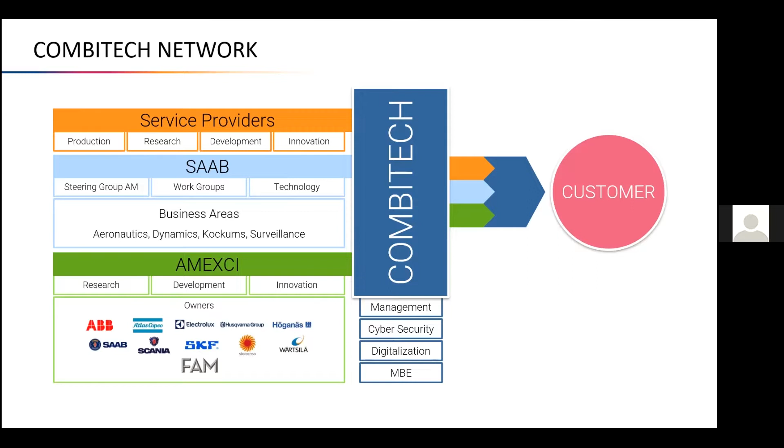This is the general process we follow when developing the AM capabilities of our customers, but of course it usually gets customized to fit with the customer needs and current knowledge and adoption of AM.

The first step is always to build a general understanding of additive manufacturing, where you want to get an understanding of what AM processes and materials are available on the market and what the strengths and weaknesses are of the different processes. We would also be looking at how AM is applied within different industries today.

After getting an understanding of the technologies that are available, the next step is to start looking at your own product portfolio and identify which applications of additive manufacturing could be the most relevant to your business.

You identify values that can be achieved through additive manufacturing in your product portfolio and the services you provide. This enables you to form a strategy of which technologies to focus on moving forward, and to set up future goals and start moving towards achieving them.

After you have identified possible applications, you proceed to evaluate them. This can be done through a part screening and a part selection, where applications are evaluated in two different dimensions: the technical fit and the economical fit.

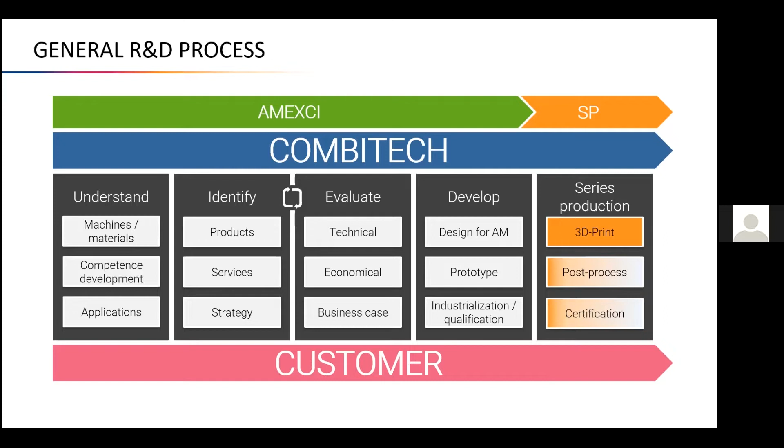I mentioned AMEXCI, which is located in Karlskoga, where they have built a state-of-the-art AM lab with production and material testing available in-house, and partners for post-processing located nearby. This is our testbed for additive manufacturing.

The owners of AMEXCI consist of 11 companies that all work actively in additive manufacturing. A huge advantage with this setup is that we don't have any competing operations within AM. This enables an open exchange between the companies.

And this is a small preview of their lab.

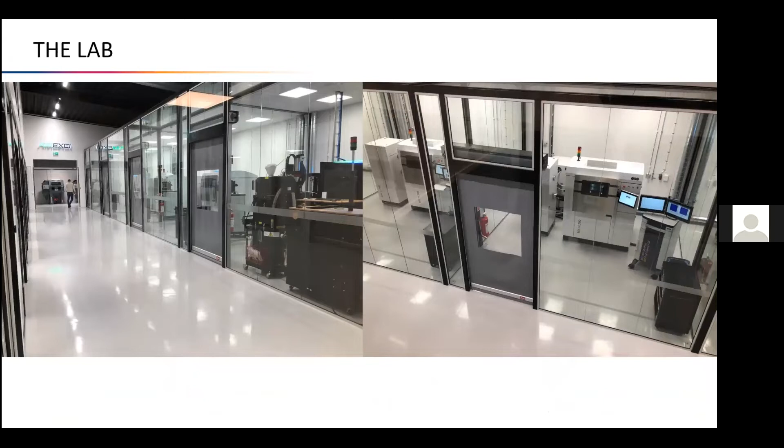Additive manufacturing, sometimes referred to as 3D printing, is a collection of processes that share a common manufacturing method: making components through joining materials, usually layer by layer, in an additive process based on a 3D model.

This makes AM different from traditional manufacturing processes, which rely on subtractive and formative processes. With additive manufacturing, we only add the material we want in our component, compared to subtractive manufacturing, where we remove unwanted material from a larger piece, and formative manufacturing processes, where we cast or form material to the desired shape using tooling.

In the end, it's the production method, joining materials layer by layer from a 3D model, that allows us to create value with this manufacturing method.

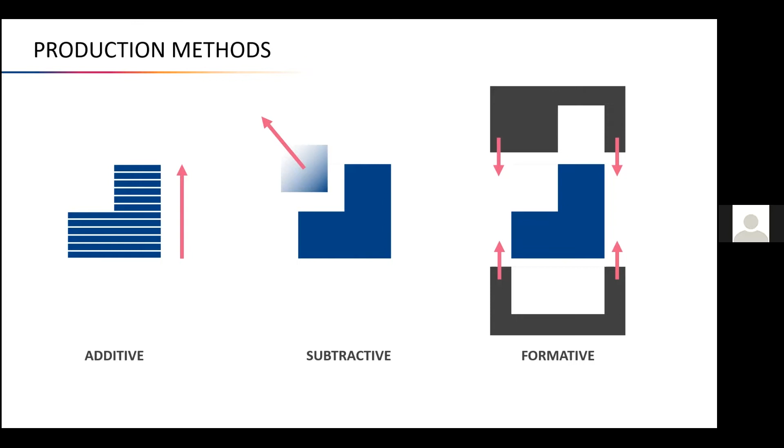AM as a manufacturing method includes a wide variety of different technologies and terms. The most common way to classify and differentiate the technologies today is by grouping them into 7 main process categories, defined by a common ISO and ASTM standard.

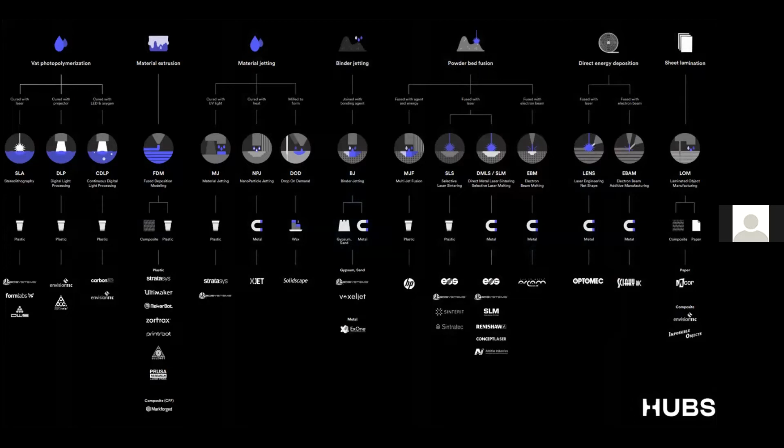For printing polymers, we make use of powder bed processes, extrusion-based processes, and processes that rely on curing of light-activated polymers.

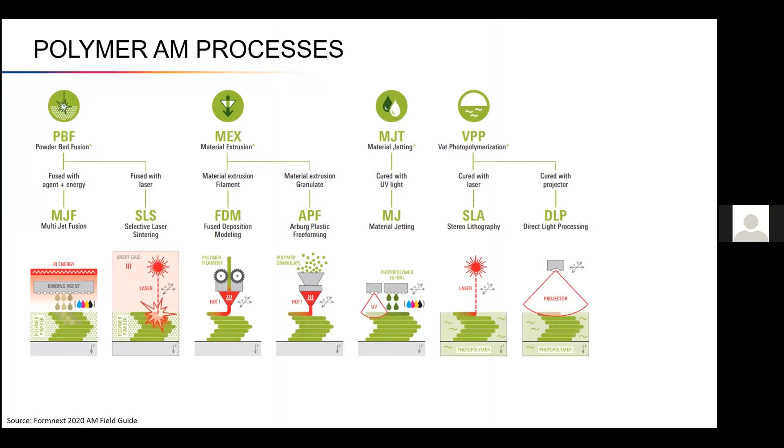For printing metals, we also make use of powder bed processes, as well as welding processes and a wide variety of technologies that produce green bodies that can later be sintered into an end-use part.

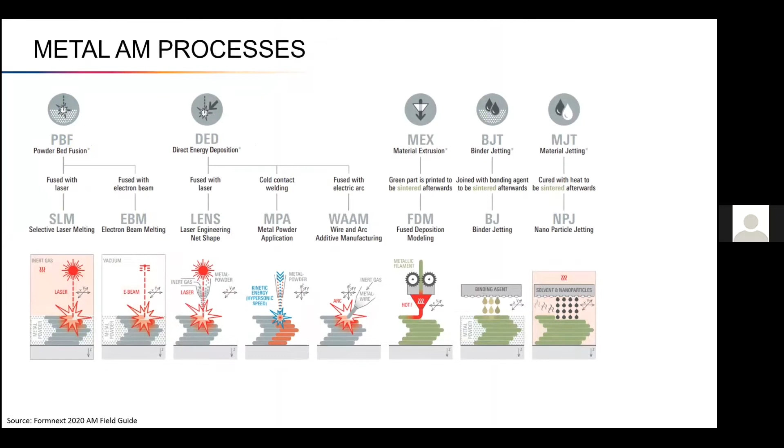Some other materials you can print that are also good to be aware of are continuous fiber extrusion, which enables you to print fiber-reinforced polymer parts. You can also use binder jetting with sand or gypsum powder, which is often used to produce molds for castings.

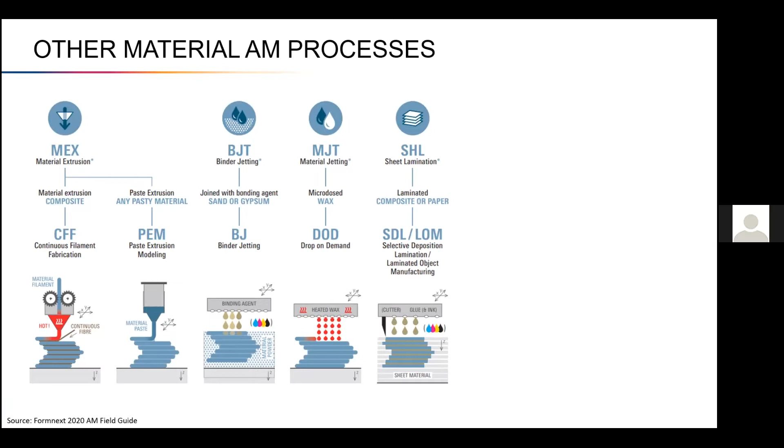AM is already affecting entire industries by changing products, supply chains, and business models. But to achieve this, it's not enough to just take an existing product and put it in a 3D printer. What we need is a new way of thinking around value creation with additive manufacturing, and this is what we often refer to as the AM mindset.

Understanding how additive manufacturing creates value for a specific application is key to success, and it's important to understand our goals with the technology. Instead of starting with analyzing if it's technically possible to produce something with additive manufacturing, it's often more beneficial to start with understanding which applications will produce the most value.

We usually split value creation with additive manufacturing into three broad perspectives: how can we improve the product function and performance, how can we improve the supply chain for our products' life cycles, and how can we create a business model by capitalizing on these advantages?

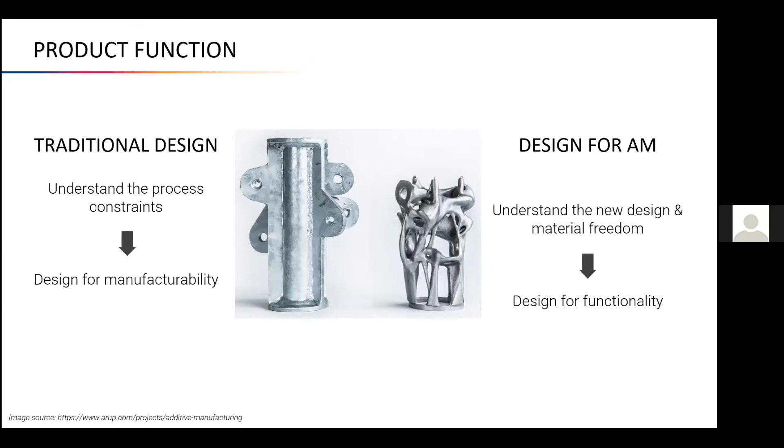It is also important to understand how additive manufacturing can affect our supply chains. The values here will often surpass the value we are able to build into the product itself.

Traditionally, supply chains are spread out by necessity. They involve many different steps that all require their own footprint, resulting in supply chains that involve several different companies and several locations. The complexity of these chains motivates larger production volumes and causes production to centralize. We are often hesitant to build up the same complexity at more locations than necessary.

Additive manufacturing can create value by removing a lot of the spread and complexity of the supply chain. A component created through additive manufacturing will not require a foundry. It will require less machining and can avoid assembly steps. All of these steps can be contained within a single machine within its footprint. Not having to invest in tooling can make low volume production and individually customized components a very cost-effective option.

We also have the freedom to move production closer to our end users, since the only product-specific resource that needs to be distributed in this decentralized production is the digital 3D model of the component to be produced.

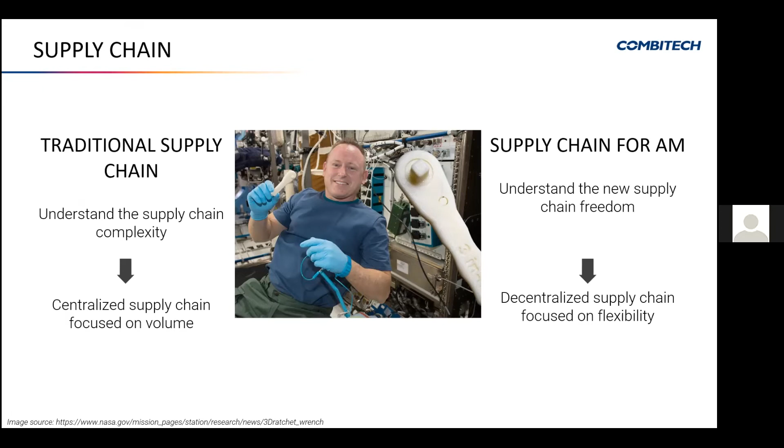To highlight an example where I've taken advantage of all these three areas for value creation, we will have a quick look at this pneumatic gripper for ball bearings created by Wittmann Robot Systems that has been completely redesigned for additive manufacturing.

The old design consisted of a metal base plate with several pneumatic actuators, all connected with hoses and connectors. The entire assembly is then mounted as an end effector on a robot arm that moves ball bearings in the production line.

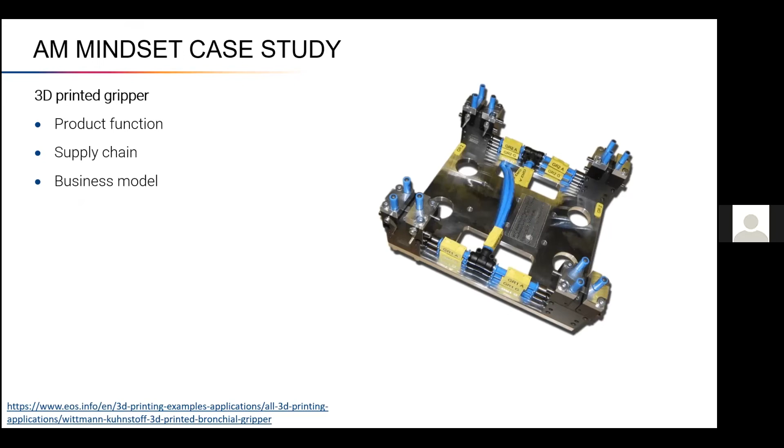Understanding different AM processes and their advantages and drawbacks is of course important, but the design process really starts with the end user and their challenges. Instead of taking existing components and adjusting them to make them printable, we have to rethink production from the ground up. Thereby, we can provide a design that is focused around function.

So what is the key function of the product? What are the pain points with the current solution? How could the design flexibility of AM improve the design? And which AM process and material could be suitable for an application?

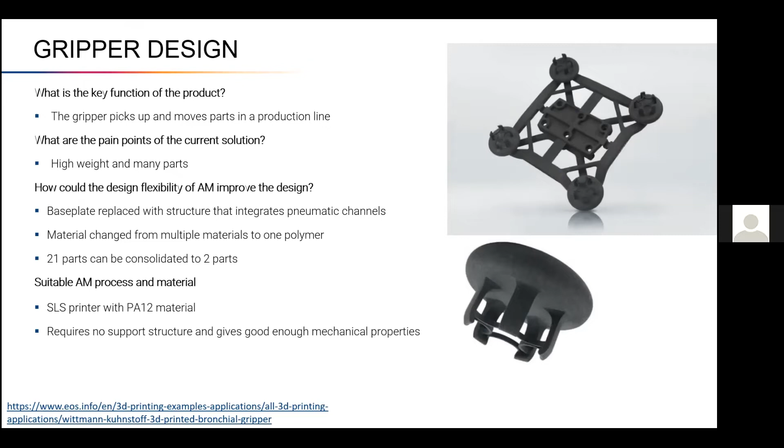Besides optimizing the design of the component, we also must analyze how we can improve the supply chain. AM is a digital manufacturing method which allows us to create supply chains that are less complex, with reduced lead time during both development and production.

What challenges could exist in your current supply chain, and how could an updated design help solve these problems? What would be the best production setup? If we choose a production location close to our end users, we can provide shorter lead times, reduce shipping, and thereby get a lower environmental impact.

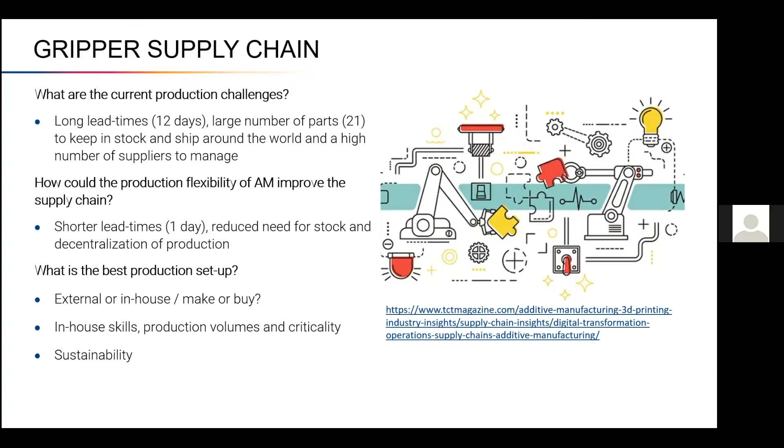The last step is to understand if the current business model is still suitable, or if AM can affect parts of it. AM might not become the main driving force behind a company's business model, but it's still important to understand how AM can support your business model.

This is challenging, but can lead to some major competitive advantages. So what are the pain points of the current business model, and how will the use of AM affect these problems? How could a new business model look? In this case, instead of focusing on standard components or expensive and complex customized solutions, the company could now offer customized solutions with short lead times to possibly widen its customer base.

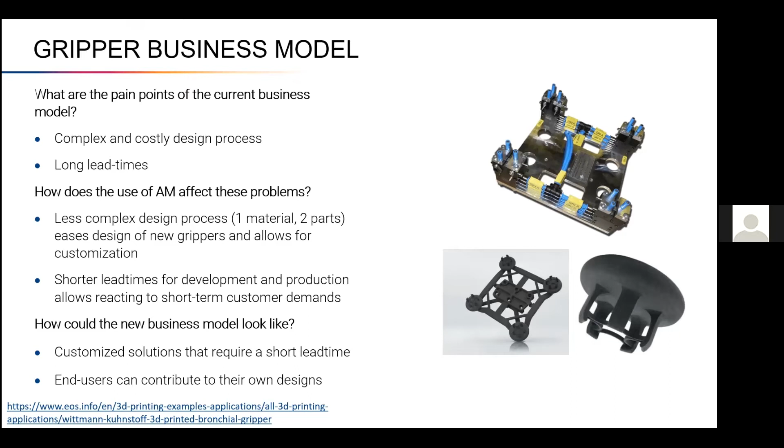AM is not going to be the end of traditional manufacturing methods, but it's a powerful new tool to add to your toolbox, bringing both new possibilities and challenges.

AM offers the potential to produce parts in low quantities at a relatively low cost. This mainly comes from the fact that no tooling is required, which makes AM technologies generally very competitive for low to mid production volumes.

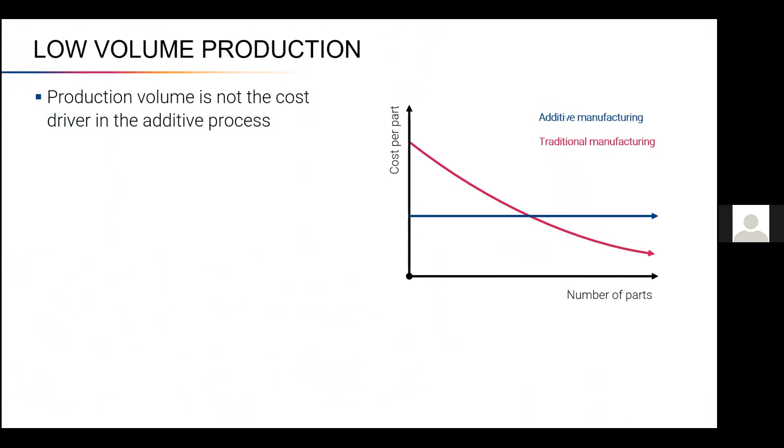AM also offers increased freedom of design when compared to traditional subtractive or formative manufacturing. However, AM processes are not without their own design guidelines and limitations. An AM part will usually need to be redesigned with AM in mind to be effective. Popular examples of how to do this include part consolidation, topology optimization, internal channels, thin wall, and organic structures.

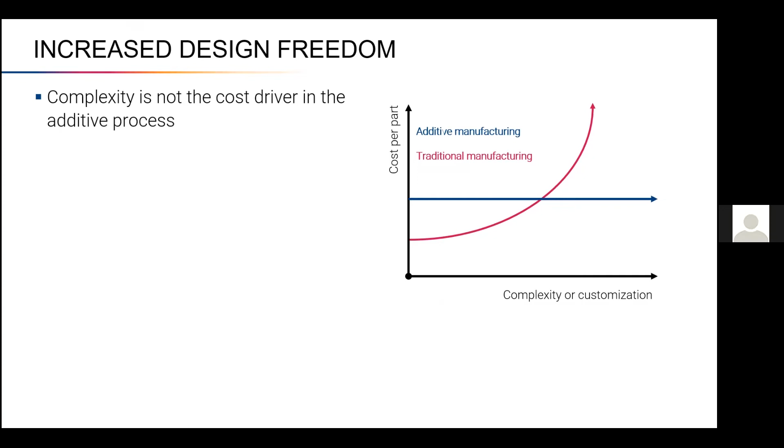One of the benefits is lightweight design, which consists of methods and practices to make components and products weigh less while retaining or even enhancing their technical and mechanical functionality. This is one of the key applications for the design freedom that AM brings, usually achieved with design features such as lattice structures or topology optimization.

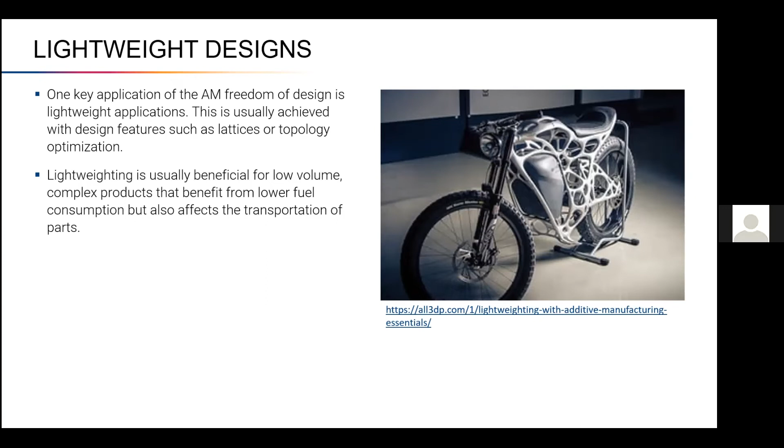Lightweighting can be very beneficial for low volume complex products that benefit from lower fuel consumption. Another aspect is that minimizing the material in the part will usually lead to a shorter print time, thus lowering the manufacturing cost of the component.

Functional optimization is another important topic enabled by additive manufacturing, and it involves using design freedom to optimize our design. Often our current designs are limited by what can be efficiently manufactured with traditional manufacturing methods. With the geometrical freedom enabled by many AM processes, we are able to remove bulk material, replace material with lattice structures, or even topology optimize our products and remove all the material not required for our loads.

For a lot of applications, performance is key. For instance, an airplane that is light will consume less fuel and carry more cargo, and this increased performance will often motivate a higher component cost.

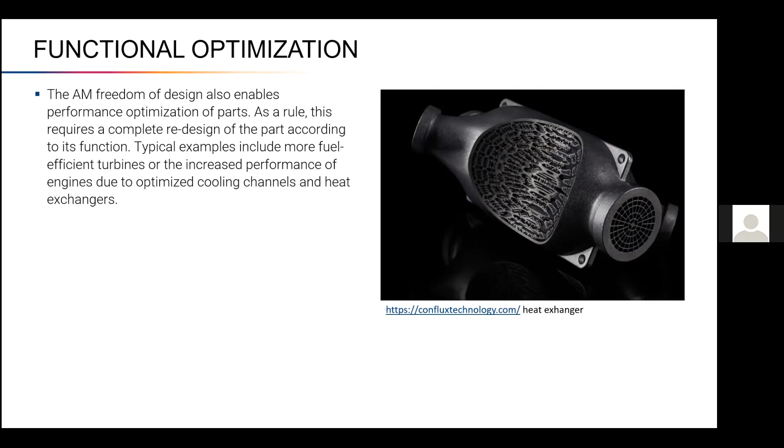Looking at supply chains of products can also provide opportunities to gain value from additive manufacturing by utilizing its flexibility. With additive manufacturing, we have the possibility to keep our raw materials in stock and manufacture our parts when they are needed, instead of keeping a costly supply of spare parts.

The relatively small footprint of an additive production line enables us to set up production closer to our end users. We can also be sure that we're always supplying the latest version of our parts without it affecting our part cost. This can be especially valuable for systems where downtime is expensive, such as oil rigs or airplanes.

And the decentralized production where spare parts are required, such as the International Space Station, as well as industries that need to keep expensive spare part inventories, and where quick access to custom tools and fixtures is needed.

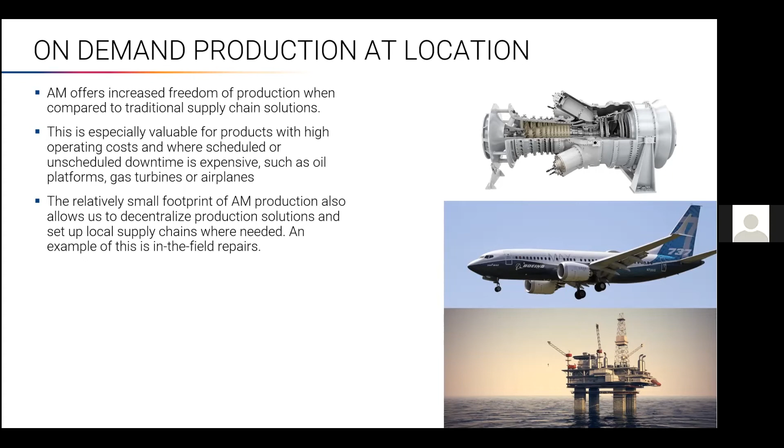Another big advantage with additive manufacturing is the ability to produce several different geometries on the same build plate in the same batch. One early adopter of this approach has been the hearing aid industry. Today, custom-fitted hearing aids are almost exclusively manufactured with additive manufacturing.

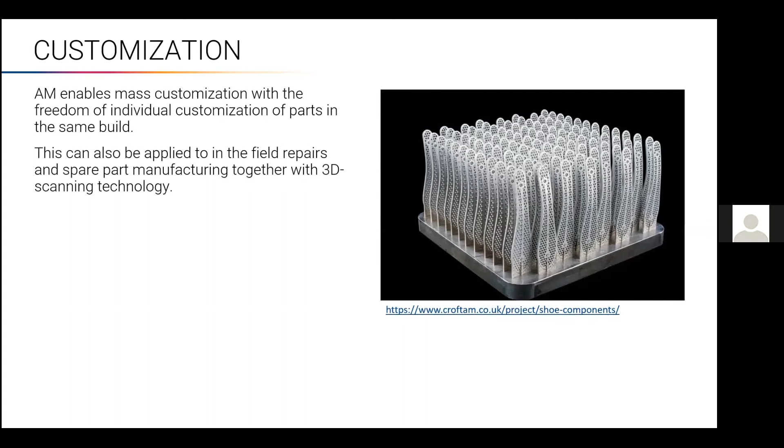Additive manufacturing is today used in a wide range of industries. Since its origin as a prototyping technology in the 80s, it has come a very long way. Today, applications can be found across the entire value chain, from prototyping to spare parts and repair. I will end this presentation with a brief overview of different AM applications in different areas.

The use of AM for prototyping during the product development phase is probably the oldest and most widely used application. While often low-cost polymer technologies are used for prototyping, basically every technology available can be used. Depending on the development stage, prototyping can include simple visual models, but also functional prototypes to perform, for instance, flow testing. The possibility to quickly produce designs without needing to invest in tooling can save significant time and cost during the development of new parts.

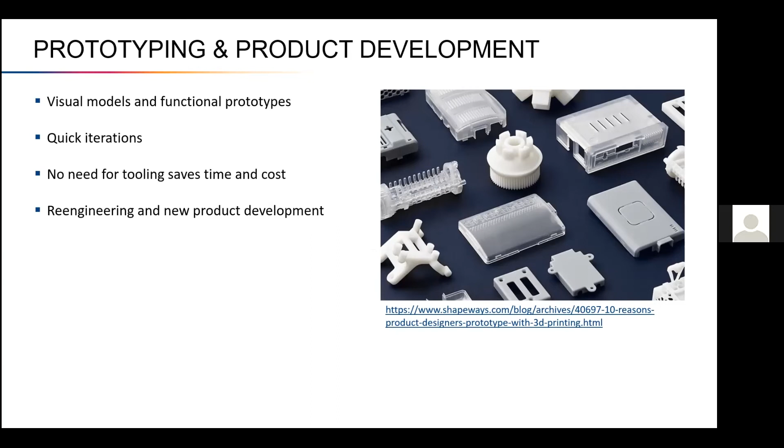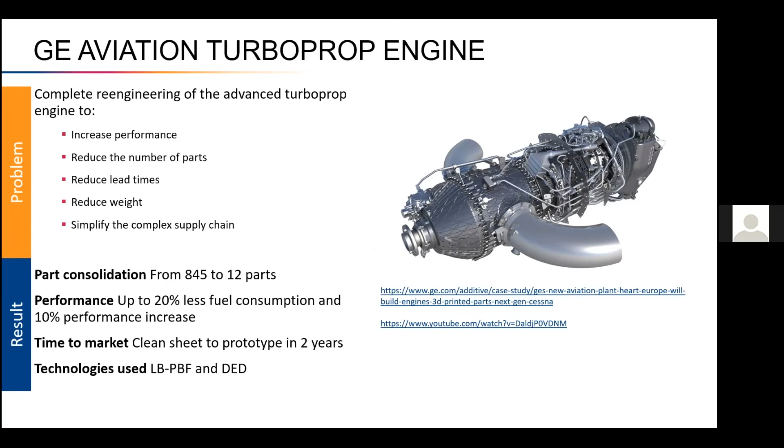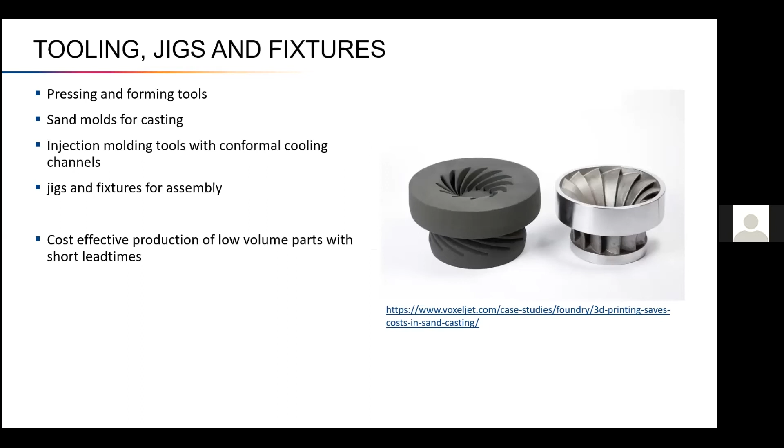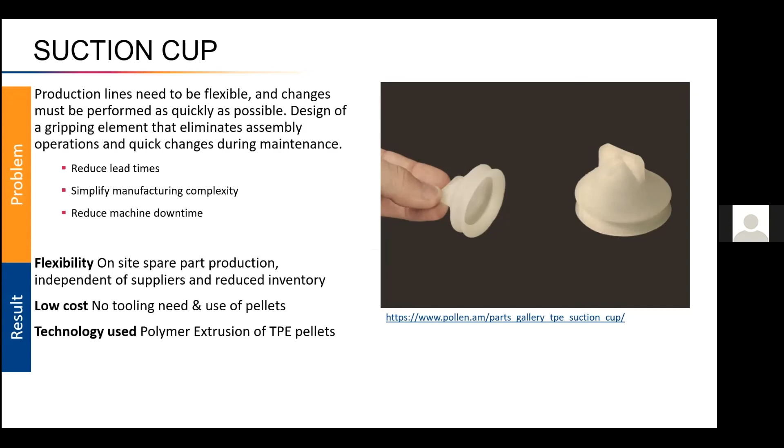Over the last years, additive manufacturing has developed from a tool mostly used for prototyping to a manufacturing technology for end-use applications in almost all industries. While many companies aim at using additive manufacturing to reduce manufacturing costs, the biggest potential can be realized when completely redesigning a product for its function. The design freedom can then significantly improve the performance of the part.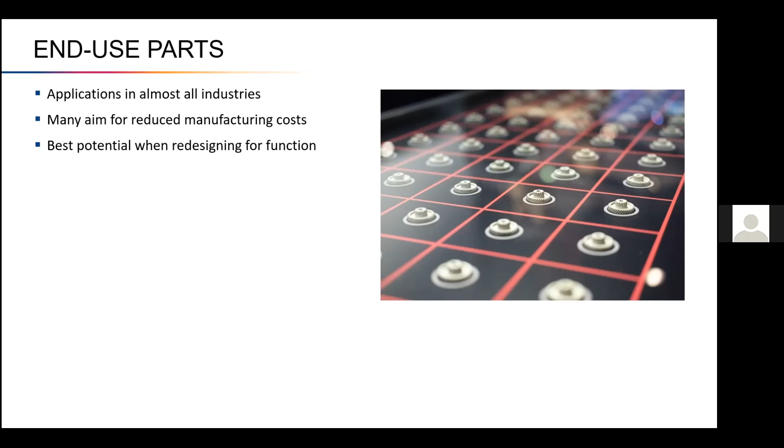This case is a hydraulic part for an AIRBUS A380. The objective was to replace a conventionally manufactured valve block with an additively manufactured one. The part was produced by Liebherr Aerospace and used in the AIRBUS A380. This is a primary flight control part that moves the spoiler of the aircraft to the desired position during takeoff and landing, so it must meet some of the highest quality standards available.

The original part was machined from a forged block with several machining and assembly operations, which led to very limited design freedom and long lead times. The main pain points were the weight of the part, since it was aerospace, and the qualification and assembly into the very limited space of the aircraft.

The design was optimized based on the installation space available, with the goal to keep connections as short as possible to the interfaces. Material was only added where necessary. This resulted in a part that weighed 35% less.

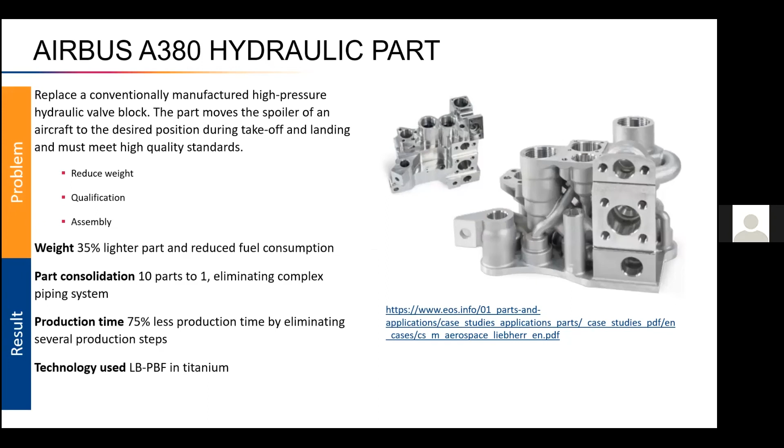Instead of simply building entirely new parts from scratch, AM can also be used to repair and build upon existing components. While there are some cases of companies realizing repair applications with powder bed technologies, welding processes such as directed energy deposition enable easy application of material to existing parts. This offers great potential to reduce costs and shorten lead times, while at the same time repairing parts reduces waste and can help companies improve their carbon footprint.

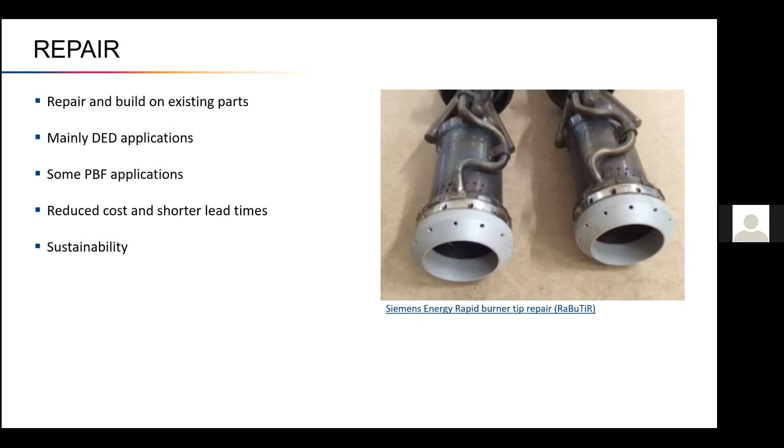Directed energy deposition technologies, such as laser metal deposition, are already a mature technology in several industries. Expensive parts with high production costs can easily be repaired, meaning the part or tool can be returned to use in a shorter time. Directed energy deposition allows users to reduce repair time, save costs, and improve their carbon footprint by repairing worn out parts of a component instead of producing new ones.

This is very effective for expensive parts, such as compressor blades in the aerospace industry, since they are costly to produce and usually come with a long lead time for spare parts and repairs. This can be especially costly when the product is unable to be used during its downtime.

This picture from MAN shows how DED is used to repair the bearing surfaces of compressors and turbine engines. The parts they repair are often up to 8 meters long and can weigh up to 10 tons. The benefits here are high quality repairs and the reuse of expensive parts and materials, combined with reduced downtime.

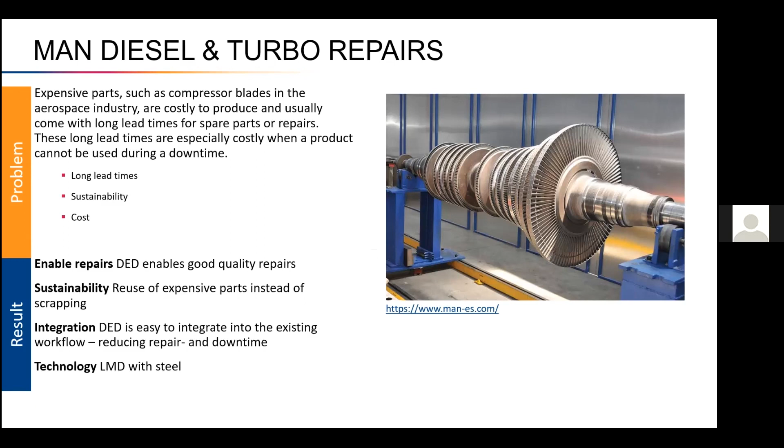Additive manufacturing also enables the production of spare parts in small quantities, which makes it a great fit for the technology. Some advantages of using AM are shorter lead times, reduced need to keep parts in stock, and no need for tooling. Also, the qualification process for spare parts is often less demanding than for a serial application.

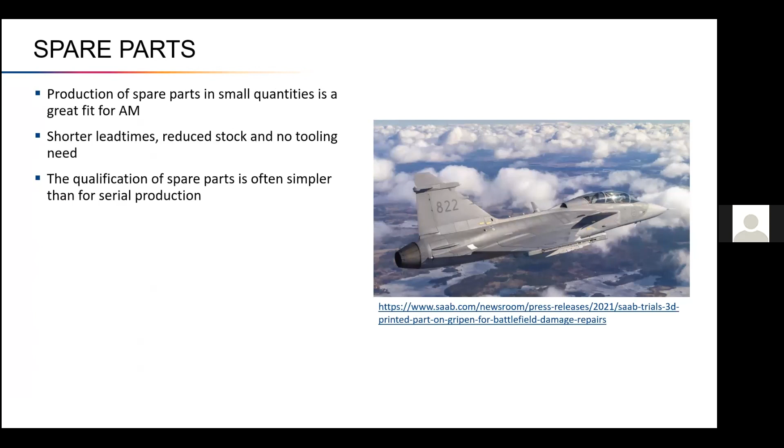Pictured here is a JAS Gripen flying with a 3D printed plastic replacement hatch as part of a battlefield repair trial.

A case related to this comes from EVOBUS, who sees increasing challenges in the field of spare parts for their buses. The company's increasing product portfolio has resulted in over 300,000 different spare parts, which results in very high costs for warehousing and logistics, as well as long lead times. In addition, minimum purchasing volumes from suppliers lead to overproduction and often to obsolete parts in their inventory.

They have identified additive manufacturing with polymer parts as an application for interior parts of the bus. Several parts, such as covers and armrests from the interior of the bus, have been identified as suitable for additive manufacturing. The benefits here are that there are no minimum order quantities, there is a reduced need for warehousing of spare parts, as well as shorter lead times and a more sustainable solution to spares.